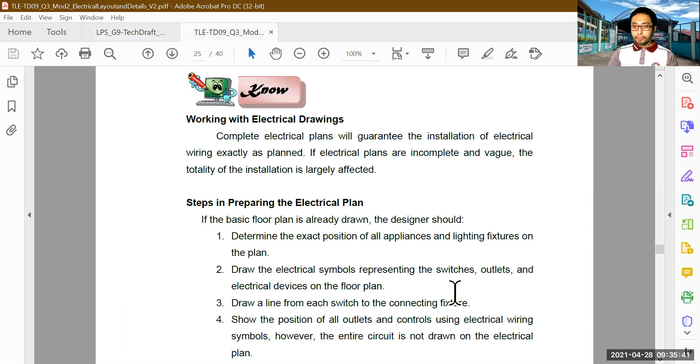Okay, so as I was saying, ito na yung inyong this is page 25 of your module 2. So working with electrical drawings. Ito naman yung steps ng electrical plan, and they are as easy to understand as possible. Or if you are not really into reading, hindi masyadong mahilig magbasa, you may just watch the videos. Halos pareho din naman yung steps na sinusunod nila, may konting explanation kung iba doon, and some of them are in Tagalog, dahil mga Filipino content creators din ang gumawa.

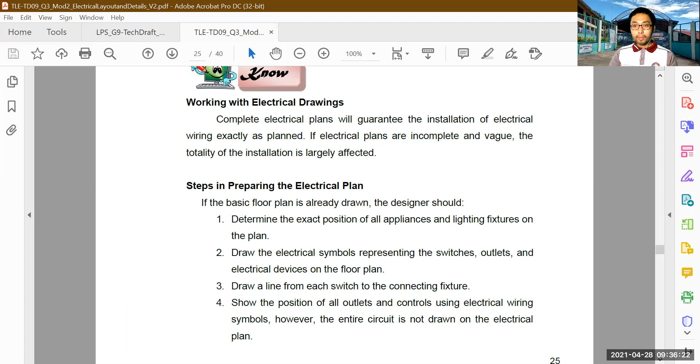And they are actually practicing it, so maganda rin na mapanood nyo. Marami rin kayong matututunan sa kanila dahil sila talaga yung ginagawa ng mga trabaho iyan. So ayan lang naman, 10 steps lang naman siya, as you can see.

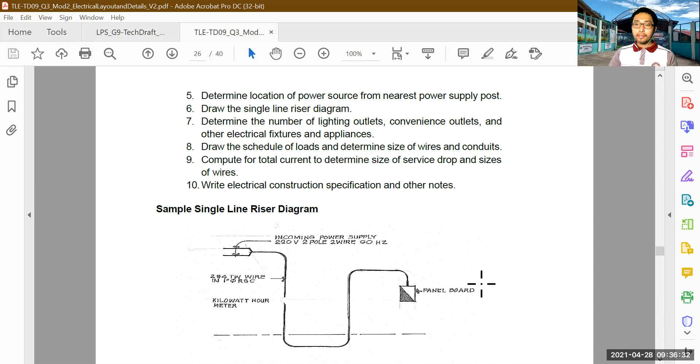10 steps to create your electrical layout. Ito naman yung sample ng ating riser diagram. Ginagawa rin ito, usually this is done by professionals, skilled electricians, dahil sila yung talaga nakakaalam ng mga ito.

Diba? Pero syempre, if time permits, we can delve into that a little deeper, para ma-explain din natin. Because of the time constraints and the modality that we are into right now, which is the online distance learning or distance learning overall, generally medyo mahirap ituro sa inyo ito ng mga ganitong bagay.

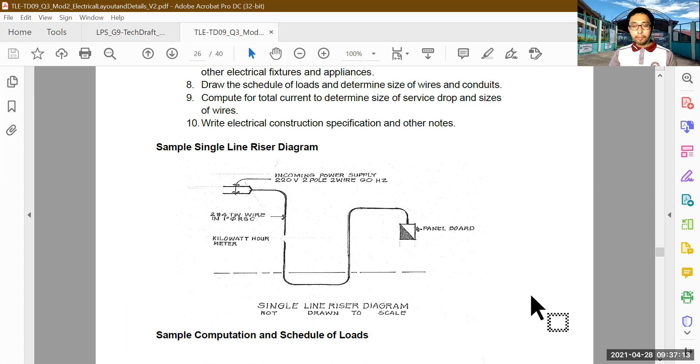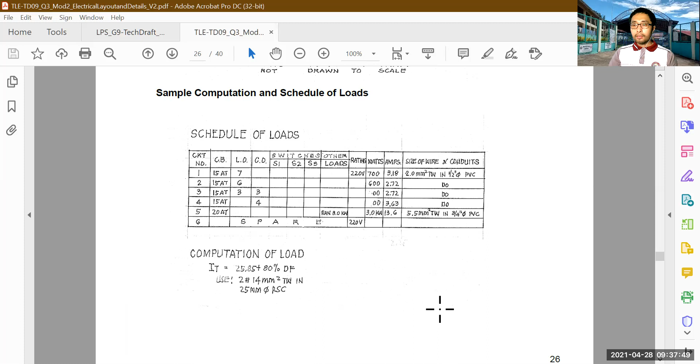Also, this one, may computation naman tayo dito. However, it really would be, as I said, risky for you to perform such computations, especially when you are not really given specialized training for this also. So pinakamaganda nito, you layout lang muna, that is as amateurs or first-timers to create electrical layouts. So yun lang muna, the computation may be done on a more advanced level.

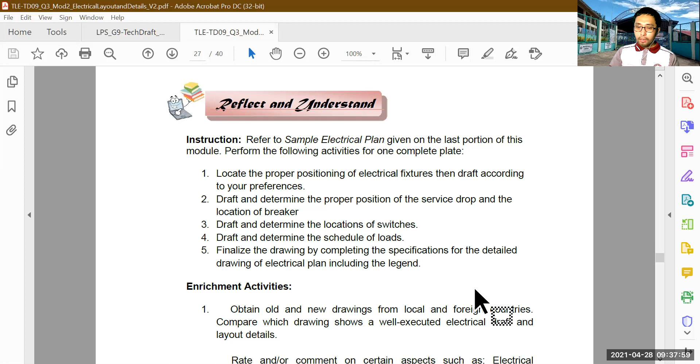Okay, tapos ito naman yung sinasabi ko sa inyo na ano, yan. These are also steps that you can follow para dun sa inyong electrical layout. Yung enrichment activity naman, this is optional. If you still have time, or you want to learn better, you want to perform, you want to make better practice, you may perform enrichment activities.

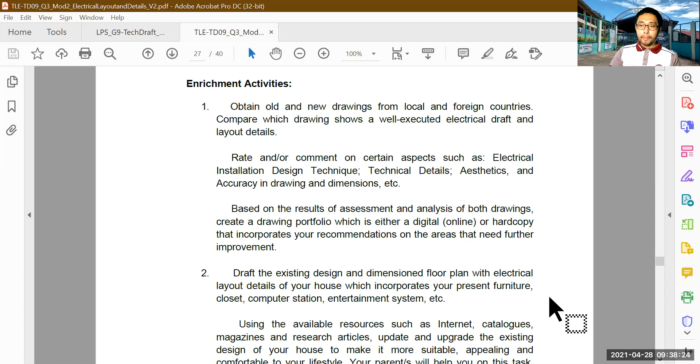Pwede ko pa rin itong i-record, and to give you additional points for that one. So hindi rin naman masasayang inyong ano. Anyway, for every activity that you perform will help you learn the topics better. So nasa sa inyo pa rin yan. If you want to learn more about electrical layouts, you may perform these enrichment activities.

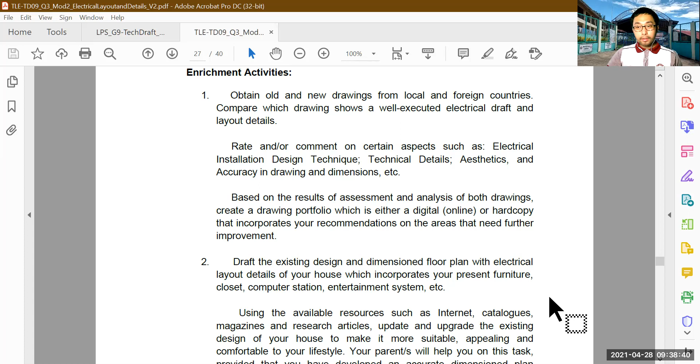So once you've done plate number 10, suppose this is already transferred. Then we proceed with lesson 2 next week. So that's it.

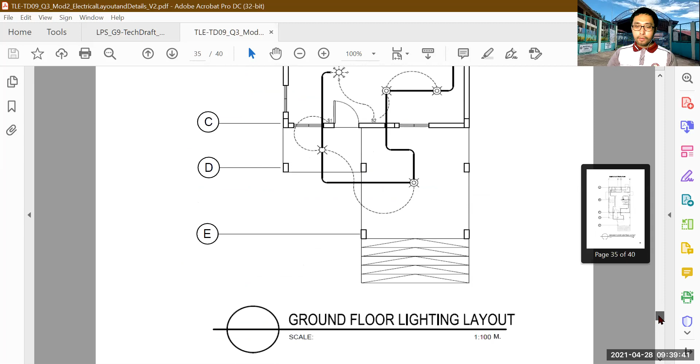There are also samples near the end of this if you want to check. We have a sample of a lighting layout. This is just a lighting layout. So what you'll do is add convenience outlets, the ones where appliances are plugged in. Then, as you can see, there are lines connecting them to each other, the dotted lines, and this is a single pole, single throw switch.

This one is the S3W or three-way switch. And this is a two-gang switch, meaning one switch turns on the chandelier and another switch turns on these two pin lights. Okay, so that's how it works.

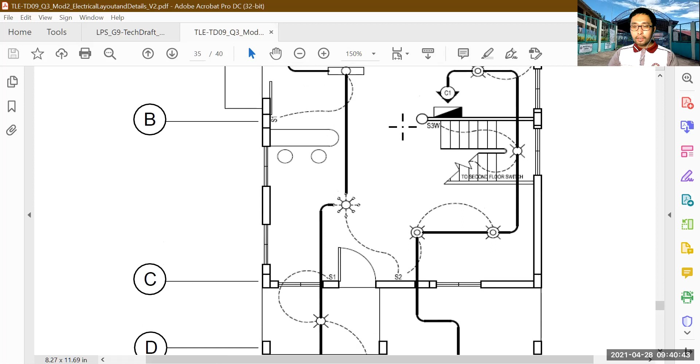If you can use templates, that would be better, especially templates for circles, or any other alternative tool you can use to create circular icons or schematic diagram symbols. This can be done so that your electrical layout drawing looks more presentable.